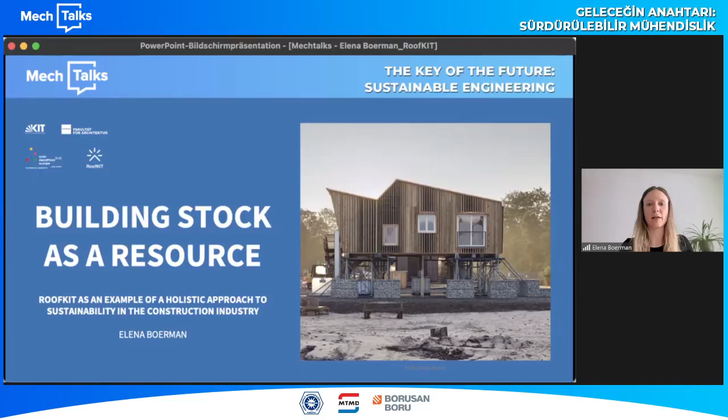I would like to introduce you today to the planning and implementation of the RoofKIT project, which was our contribution at KIT to the Solar Decathlon Europe 2021-22. The project applies the circular understanding of architecture on many different levels.

I would like to start today with a few facts about the status quo of the construction industry, which served as a starting point for us in this RoofKIT project in particular, but also guide us in our teaching and research at KIT.

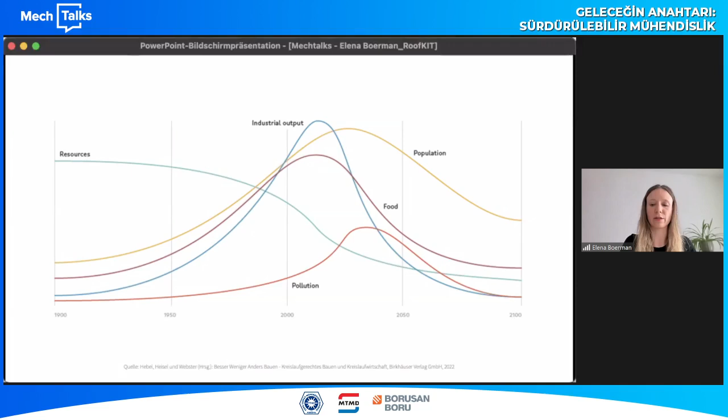Back in the 1970s, the Club of Rome, a group of various scientists, stated already that the Earth system would collapse in the first half of the 21st century due to the pollution that could be observed, the growing world population, the unsustainable use of resources, and a number of other factors.

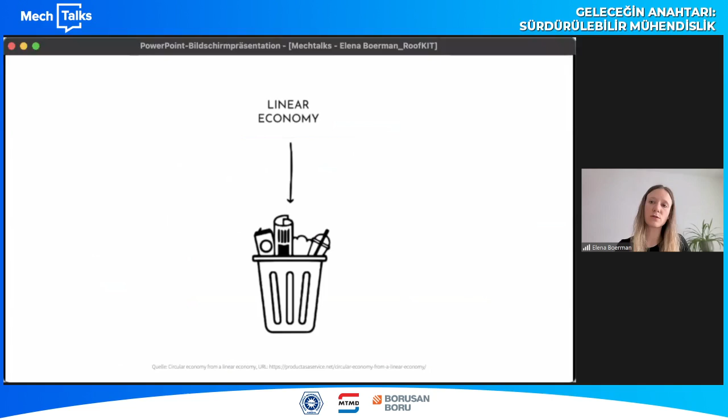And yet today, 50 years later, we still see a world that mainly enriches itself from the Earth's resources without recognizing and preserving their actual value, and which in many areas functions as a linear system from the resource to material disposal. The construction industry has a very great responsibility in this context.

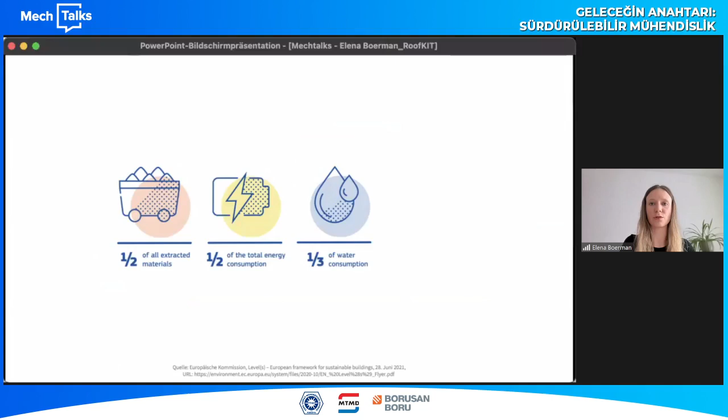The European Commission states that the construction industry is responsible for half of primary raw material extraction in Europe, and it accounts for half of total energy consumption. In addition, a third of water consumption is attributable to the construction industry in Europe, and a third of the waste produced comes from the construction industry.

But in the end, the Earth, as we see, is a closed system. All raw materials and materials that are extracted from the Earth remain on our planet in one form or another. We therefore need to think about the deconstruction of buildings right from the design, planning, and realization stages.

We need a genuine circular economy, in our opinion, in which goods, resources, and components can circulate without losing value, and in which the input of primary materials and especially the output of waste on the other side are minimized.

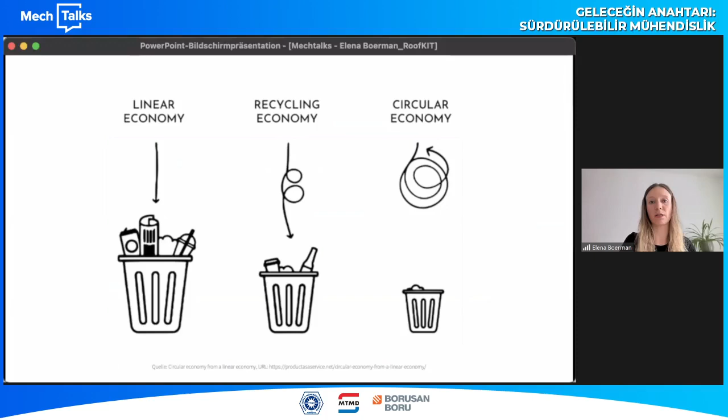Yes, how does that work? And above all, how do we get there in the construction industry? In order to realize circular construction, in our opinion, we must adhere to three important principles.

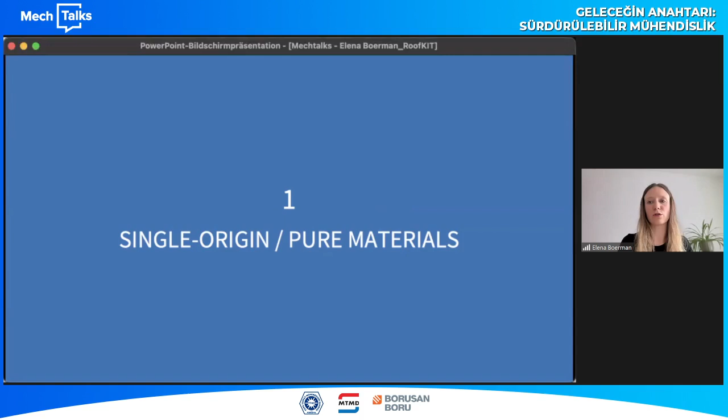Number one is that we use single origin and pure materials, because all materials that are extracted and processed on our planet Earth should circulate in one of two cycles, the biological cycle on the left-hand side or the technical cycle on the right-hand side, which were originally introduced by Michael Braungart and William McDonough under the term cradle to cradle, which you might know.

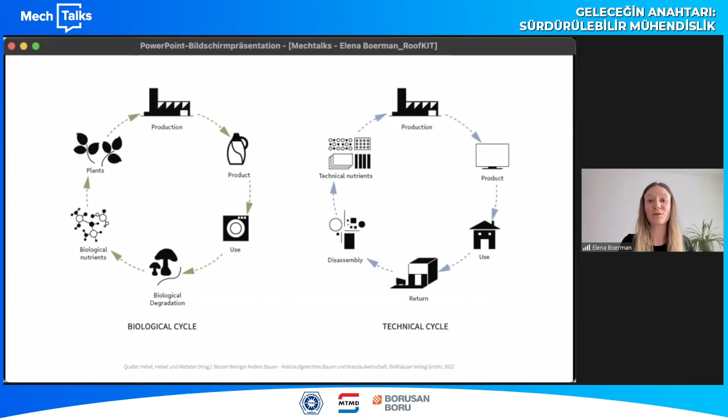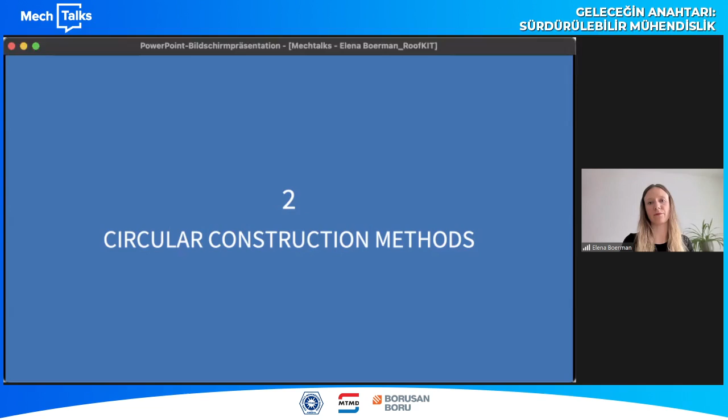The mixing of these two cycles should be prevented in order to preserve the value of resources. Principle number two is circular construction methods. In other words, single origin materials are built into our buildings in such a way that we can easily take them apart again afterwards, in a keyword: design for disassembly.

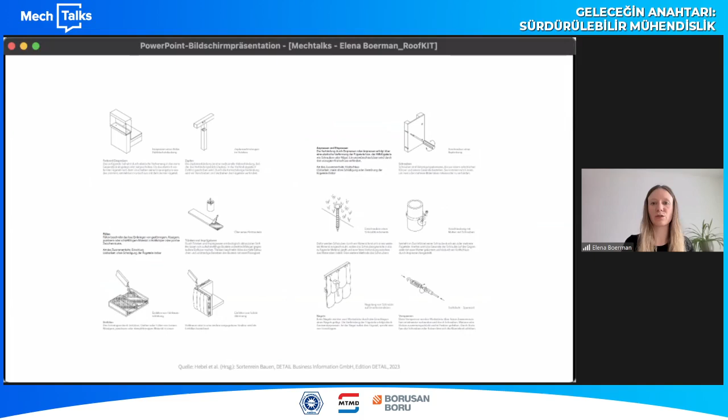Often adhesive or welded joints are used in the construction industry as they join the components together particularly firmly and quickly, and they are also durable and long-lasting, whereas detachable joining techniques require more expertise in planning and execution.

Principle number three is, in the spirit of conserving resources and preserving the value of materials, we make use of the large man-made stockpile of raw materials, the urban mine. We see the city as a supplier of many secondary materials that we can reuse or recycle.

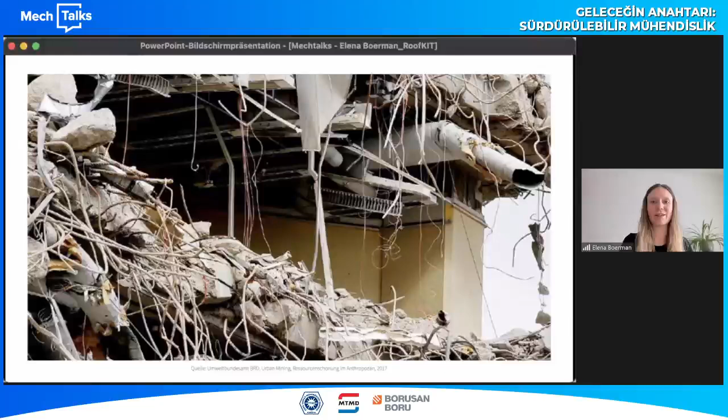But unfortunately, pictures like these show that it is very difficult today to dismantle buildings with high quality and separated recovery of building materials under the current conditions of the building stock, hence also the term urban mine, and that has to change. Using our realized project RoofKIT, our contribution to the Solar Decathlon 21-22, I would now like to demonstrate how we were able to implement these three principles of circular construction on a one-to-one scale.

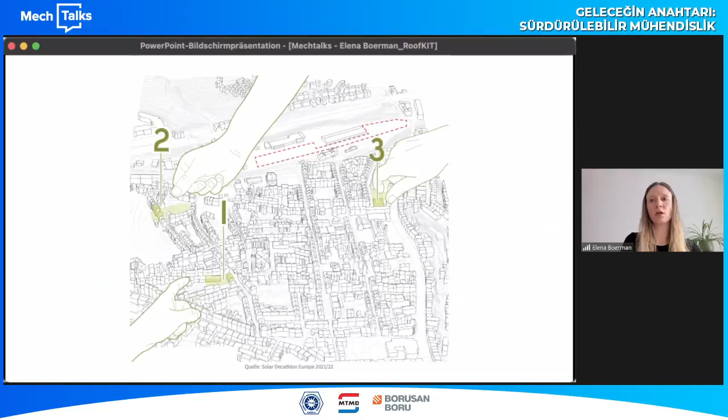The 18 university teams taking part in the SDE were asked to address questions such as how can we build in a way that conserves resources, and how can the city be redensified with living space? Three classic building tasks for redensification in cities were put to the teams to choose from: a building extension, closing a gap between buildings, or adding stories to an existing building.

Our team from KIT, Team RoofKIT, as the name suggests, chose the extension of the so-called Café Ada. This is a two-story building from the industrial era in the Mirke Quarter in Wuppertal, where the SDE was held. The building today houses a cafe and a dance hall, a real cultural venue in the neighborhood.

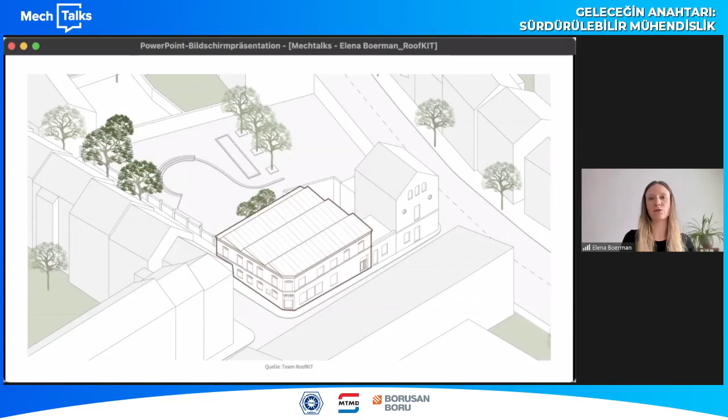In the overall design for the building, this dance cafe was retained, revitalized, and extended upwards by 3 full stories. The shed roof of the existing building is taken up again in the roof shape of the extension and serves to generate solar energy.

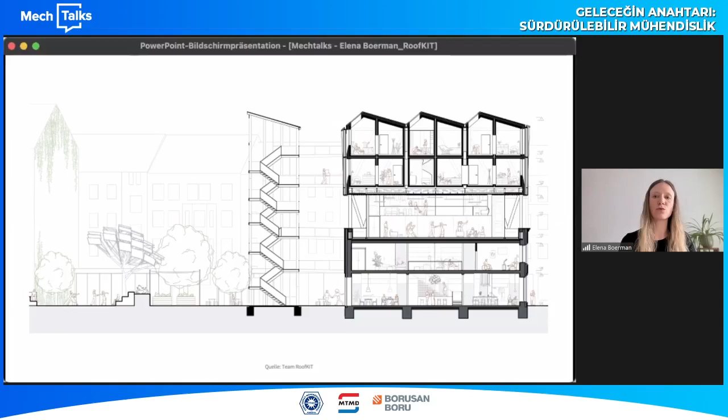The former cafe will remain on the ground floor. The first floor will be converted into a guest house. On the top floors, one can live, and the mezzanine floor between the existing and the new will be home to the new multifunctional dance hall.

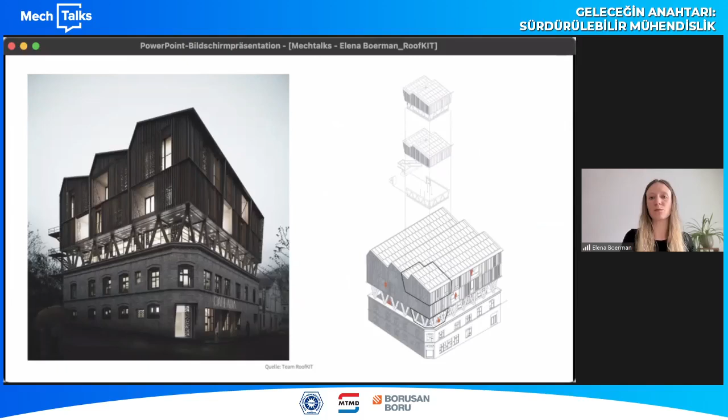However, as not all teams could really add stories to the same building, and it was simply far too large for a student's project, each team cut out a small unit from the overall design. This unit was then realized on a one-to-one scale as a prototype for the larger whole on the competition site in Wuppertal.

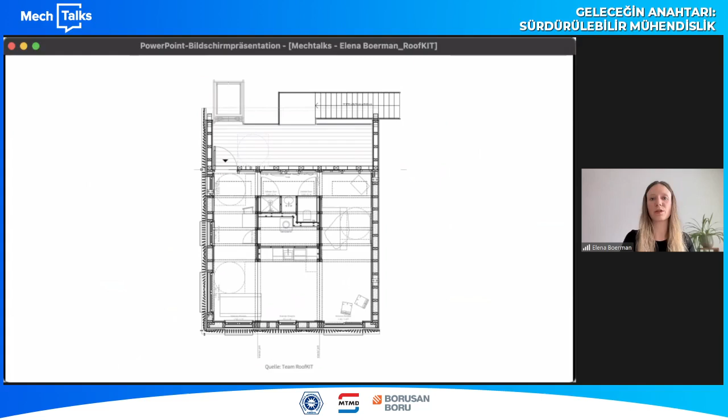Our prototype offers a 52 square meter flat for 1 to 2 people, centered around a core with an integrated utility room, kitchenette, and bathroom.

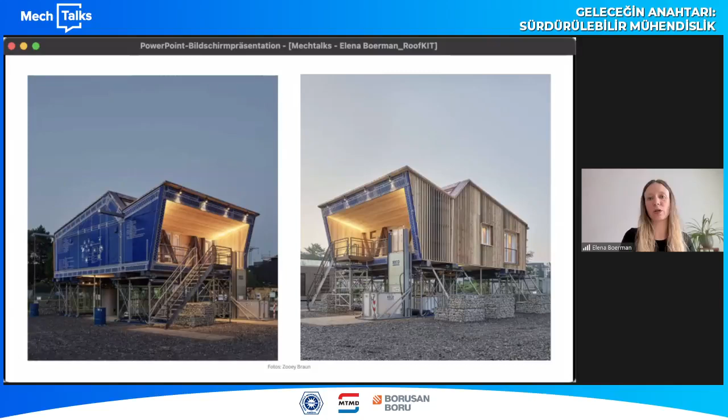Here you can see the prototype in real life. The wooden facade on the right-hand side comes from the overall design and is shown on the outside of the unit, while the other facades are fitted with a reused truck tarp on which the structural design and energy concept are applied.

The energy concept you can also see here, and I would like to briefly introduce this with a few technical hard facts about the building. The building has 12 PVT collectors that provide heat and electricity for it. The heating requirement is 24 kilowatt hours per square meter and year, and a degree of self-sufficiency of 83% can be achieved in the end.

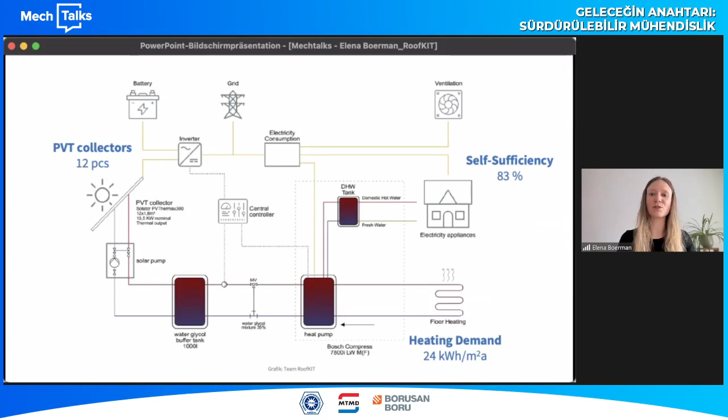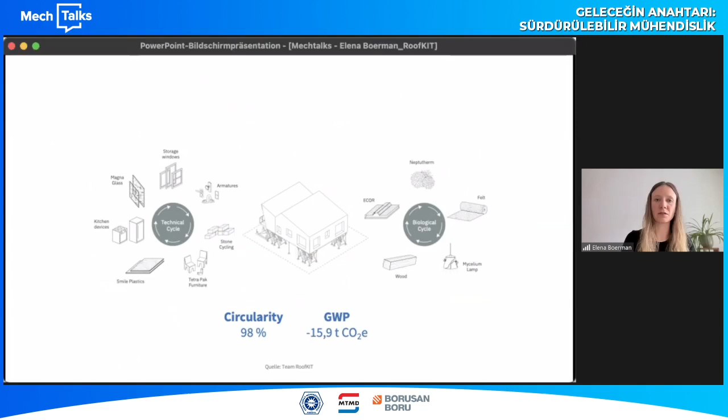It is particularly important to us that the building is designed to be circular and that a large amount of materials already comes from the urban mine. So it's a mixture of the technical and the biological cycle, and according to the Urban Mining Index tool, this enables us to achieve a circularity rate of 98%. The total global warming potential achieved is minus 15.9 tons of CO2 equivalents, according to the LCA calculation.

We strictly adhere to the 3 principles which I mentioned in the beginning, and I will start to introduce you to the single origin materials used.

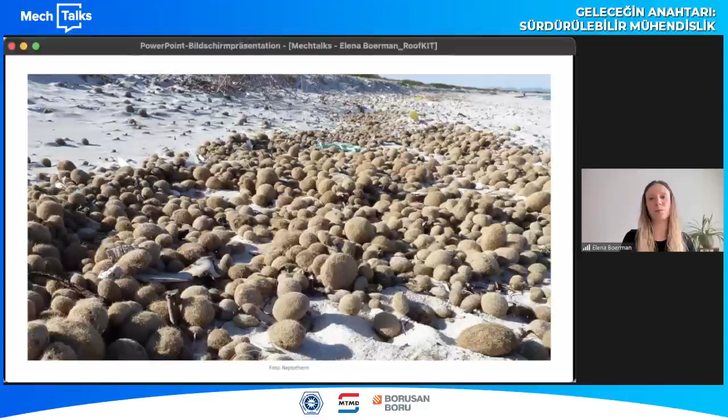One of the most interesting materials is certainly the insulation made from seaweed, collected and processed by a company based with us in Karlsruhe. Seaweed is washed up in the form of balls on the beaches of the Mediterranean Sea, for example, where it is normally collected and disposed of as waste. However, its insulating properties are comparable to other biological insulations. The material has a lambda value of 0.039, but is also rot, fire, and pest resistant due to its naturally high silicate content. The defibered seaweed balls are then simply filled into the horizontal lying timber frame construction, meaning that the insulation material can simply be removed again at the end of the building's life cycle.

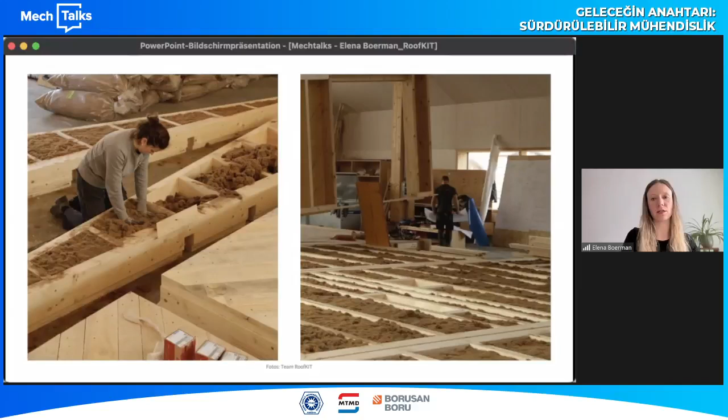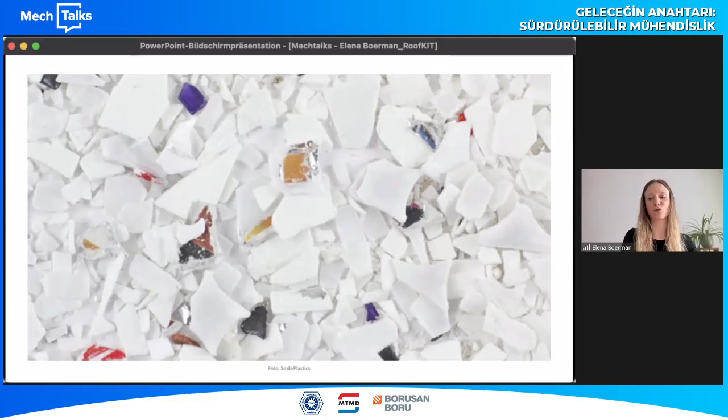Another pure material is produced by the company Smile Plastics in England from old yogurt pots. First, plastic waste is collected and sorted by color and type of plastic, which is then shredded, heated, and processed into sheet materials that you can see here. These panels can be processed in a similar way to wood—they can be sawn, milled, or drilled. In our project, they were used, for example, as kitchen fronts.

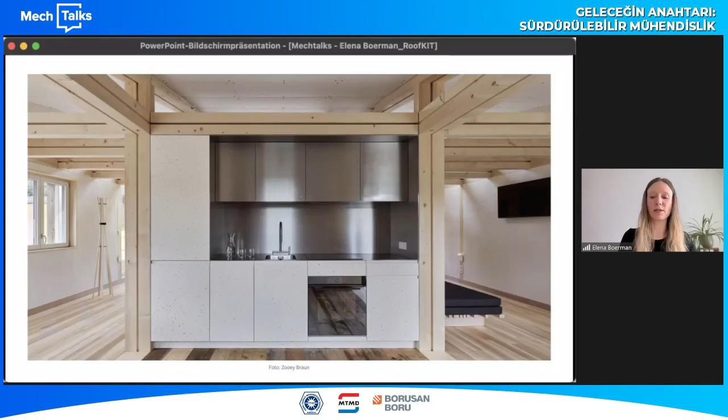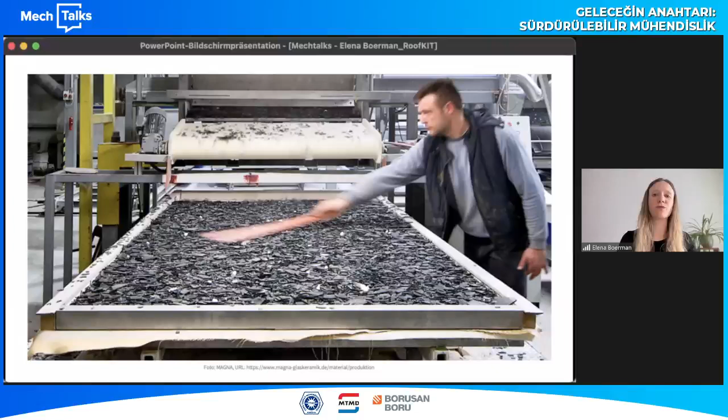Another material produced by the German company Magna consists of glass waste that is usually sorted by color and collected in Germany. These glass fragments that are collected undergo a sintering process without the addition of binding agents, only under temperature and time, and the fragments deliberately remain visible. And the sheets are then cooled, cut into the desired size.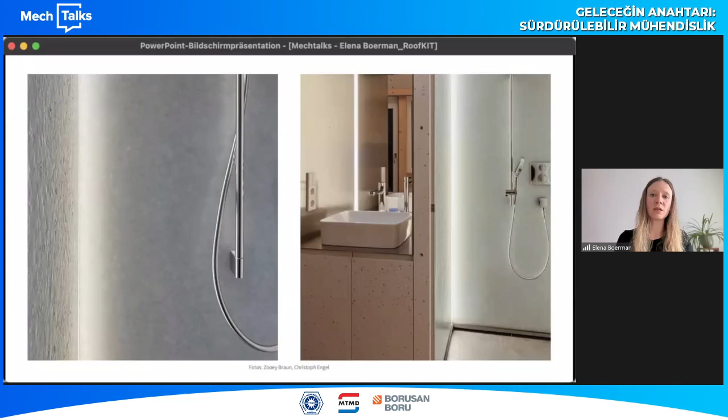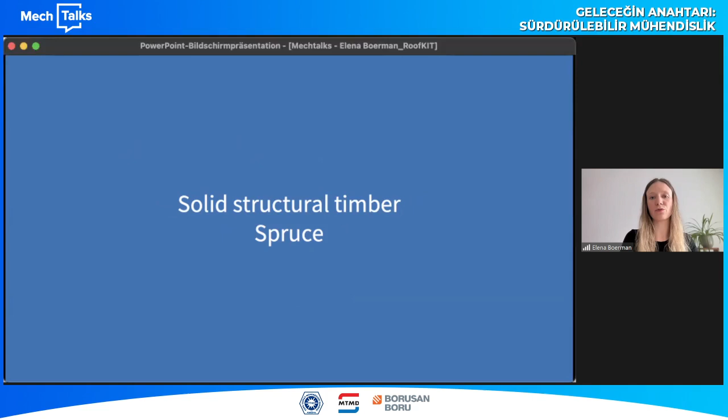Another material for which the pure use is of particular importance is the supporting structure of RoofKIT made of untreated spruce wood. The building consists of a modular timber construction made of solid wood. This means there's no glued wood in the unit. Instead, carpentry joints and screw connections are used.

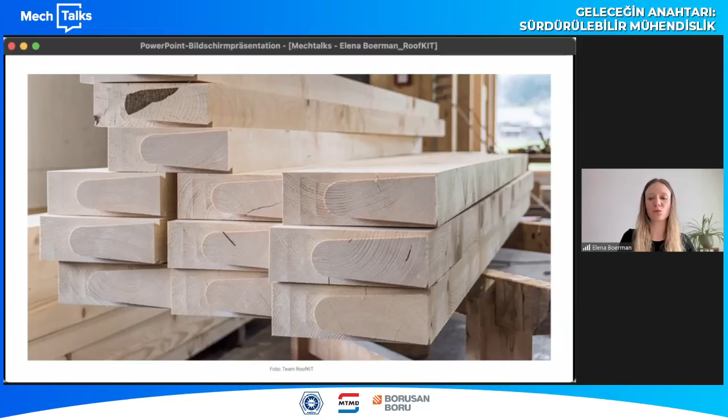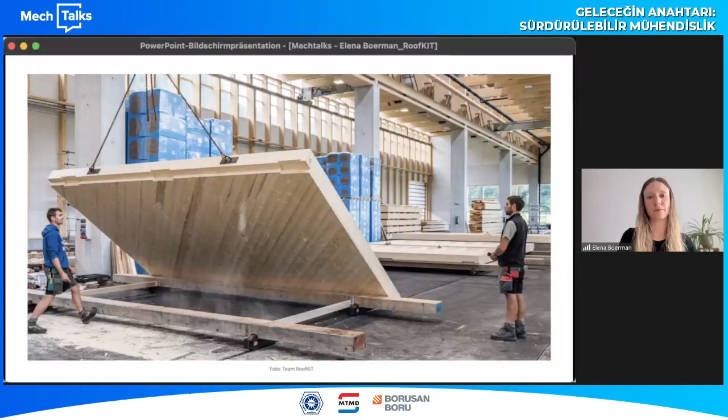Solid wood is not only used as a load-bearing structure in the modules, but also as diagonal formwork, for example, to reinforce the walls. And all of these materials mentioned are joined together in the RoofKIT prototype using circular construction methods.

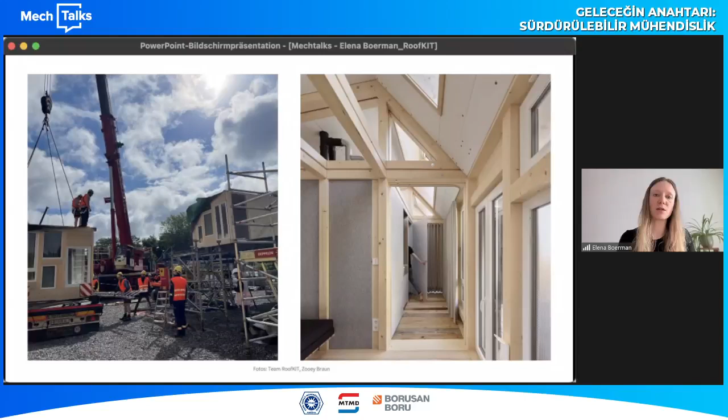The decision in favor of the prefabrication method in modular timber construction was not only due to the extremely short construction phase of the buildings in Wuppertal, I think it was 2.5 weeks, but prefabrication methods also have many advantages. The tradespeople have a weather-protected environment. The various trades do not get in each other's way or can be well scheduled, and the construction site time remains as short as possible, which is extremely relevant for building in an urban context, in our opinion.

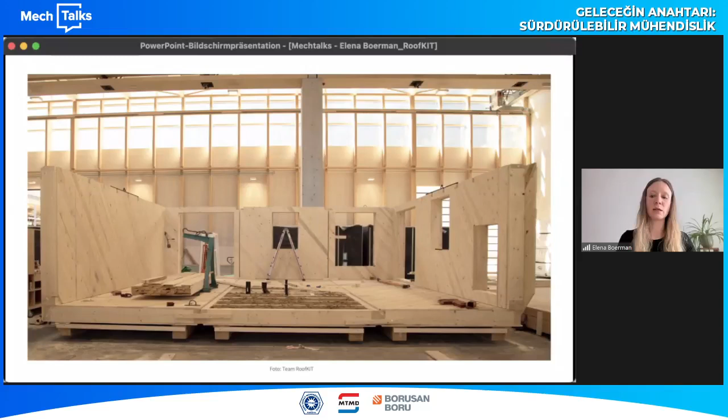Yeah, one of the joining techniques used is pin and screw, and it is certainly the best known reversible type of joining technique. The production of the wooden room modules took place over a period of around 6 weeks in cooperation with the Kaufmann Carpentry Company in large assembly halls that you can see here. And the modules were then transported on several lorries and assembled on site within a single day and fixed in place with clearly visible screw connections, as you can see on the picture.

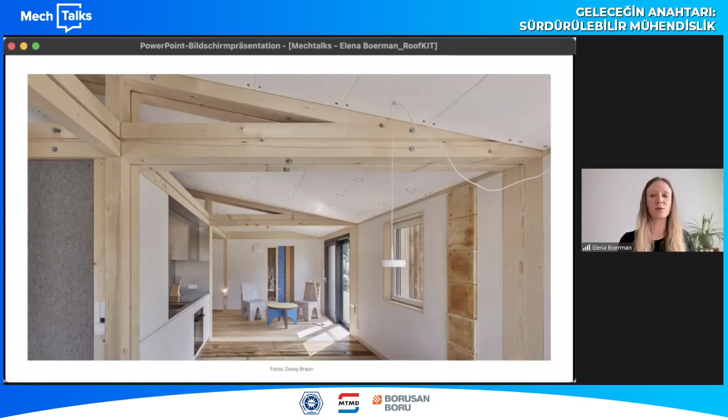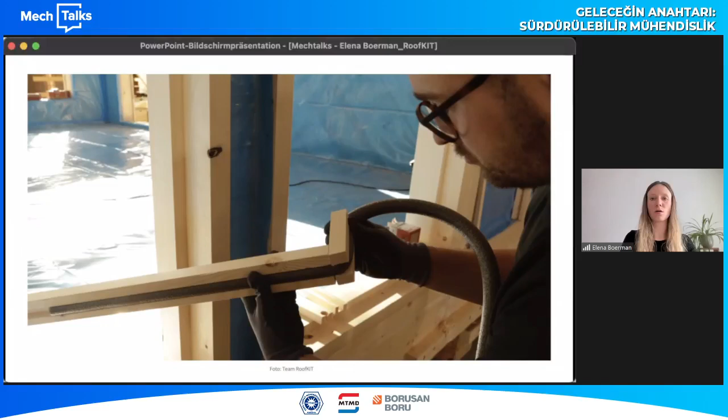Another joining technique is known as clamp and press fit. This technique was used, for example, for ceiling window reveals and in bathroom and kitchen, so we didn't have to use any silicones, adhesives, or construction foams. And thanks to stainless steel U-profiles and dry seals where the glass ceramics were put in, we were also able to do without adhesives and silicones in the wet areas of the bathroom.

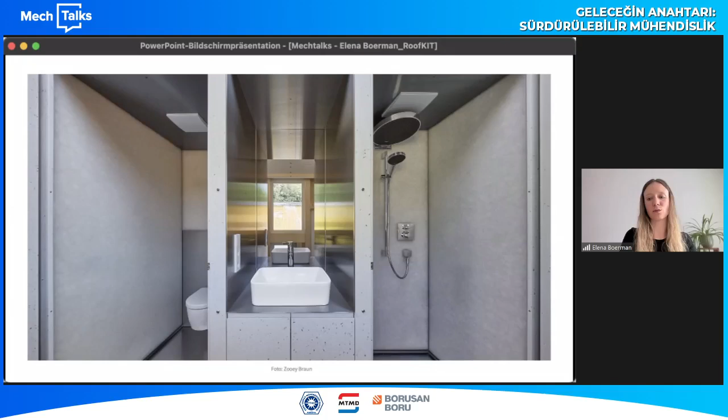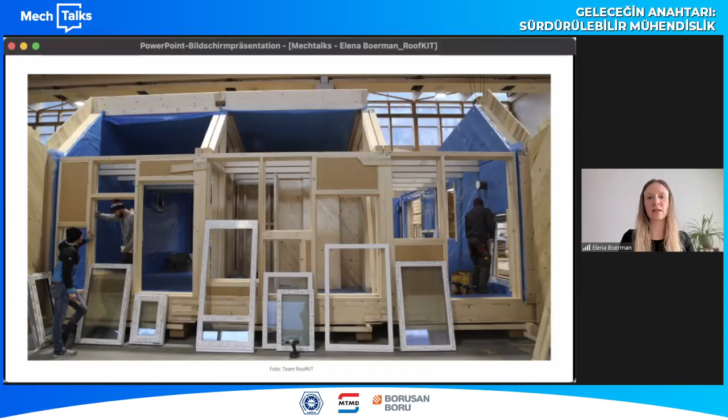Now to the third principle of the RoofKIT project, the use of materials from the urban mine. None of the windows used in the RoofKIT project was specially made for it, as they are so-called stock windows. Stock windows are in perfect working order, but have been produced incorrectly in terms of size, have been returned to the warehouse, or have been removed from other buildings. In the facades, we then take the collected windows and use them to design it.

This process shows that the serious circular economy in the construction industry reverses the design process for architects. It is not the building design that influences the choice of materials, but the availability of materials that influences the architectural design.

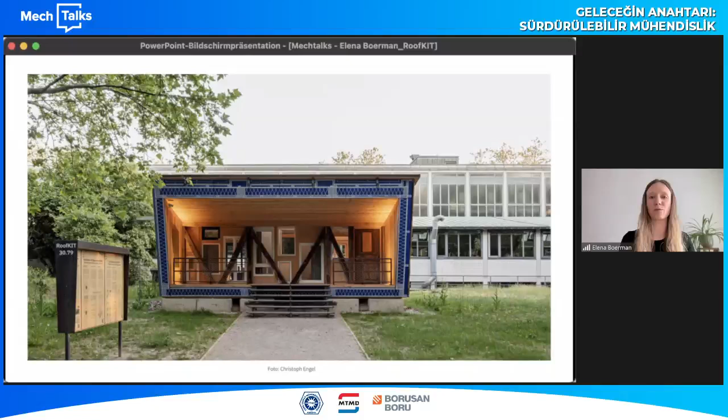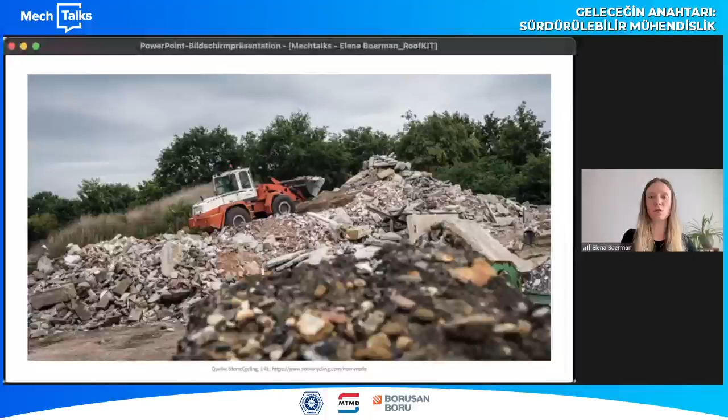Another interesting material from the urban mine are the stones from StoneCycling in the Netherlands. They use mineral waste to produce bricks that can be used as masonry bricks or paving stones, for example. And we used them as outdoor flooring in the competition phase in Wuppertal. In the end, they were dismantled and returned, and we hope that they are now used in another project already.

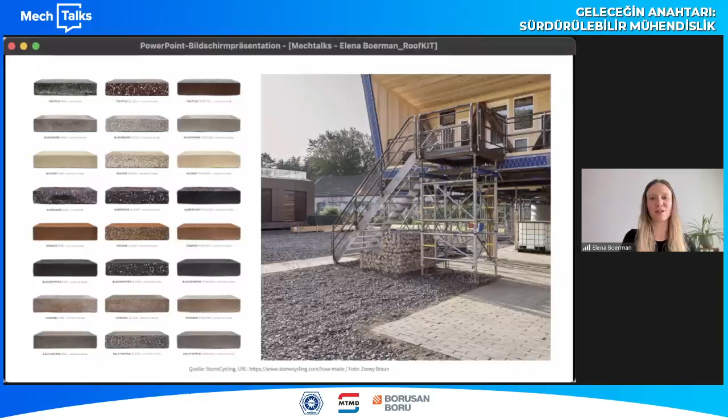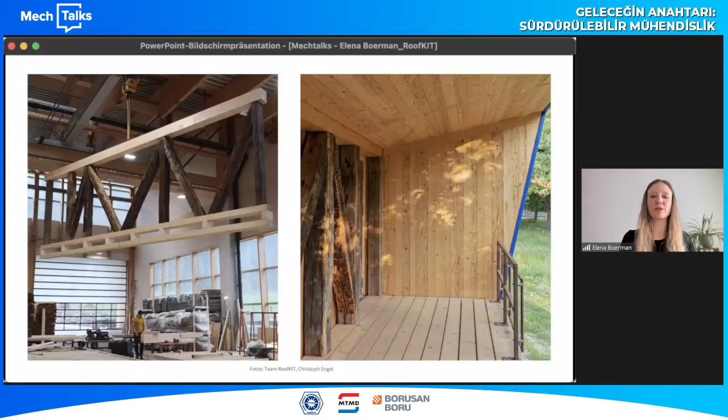And last but not least, a lot of old wood was reused in the RoofKIT project. These old oak beams, for example, were taken from a demolished building, and we were able to purchase them from a recycling center. They were used again as a beam in the facade that you can see on the right-hand side, together with new wood. The facade is also made of old wood, and that has already been characterized by the effects of sun, rain, and wind. And we leave the old wood as it is and like that the material tells its very own story.

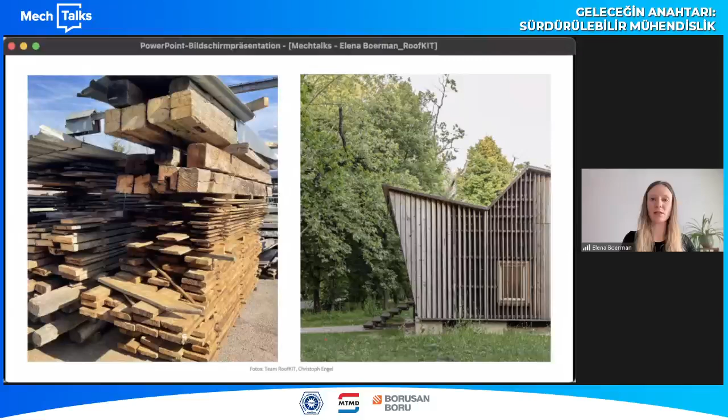And as you can see here, the RoofKIT prototype was firstly built for the SDE in Wuppertal and was then, without producing any waste or losing quality, transported to us in Karlsruhe and rebuilt there in a slightly modified form. And this is the end of my lecture.